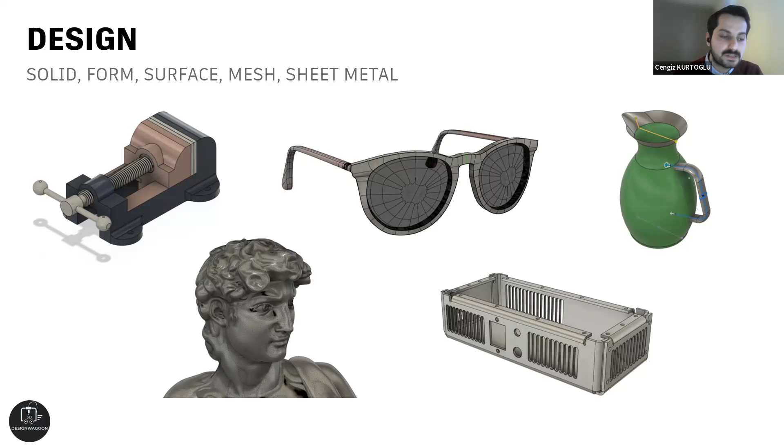And also sheet metal rules you can use in your software. And after your 3D parts, maybe you have a 3D scanner - you can use Fusion as a mesh slicer, mesh modifier, in the design workspace.

There is also animation in this account of Fusion. As you can see, there are different types of joints here, basically revolve joints. We will see these today.

The render workspace will allow us to create high quality images and animations. It's very simple to get a nice image on the same software. It will be interesting to create your parts in 3D and then create an image assigning some appearances. As you can see, there's an aluminum blue material on the appearances of these parts.

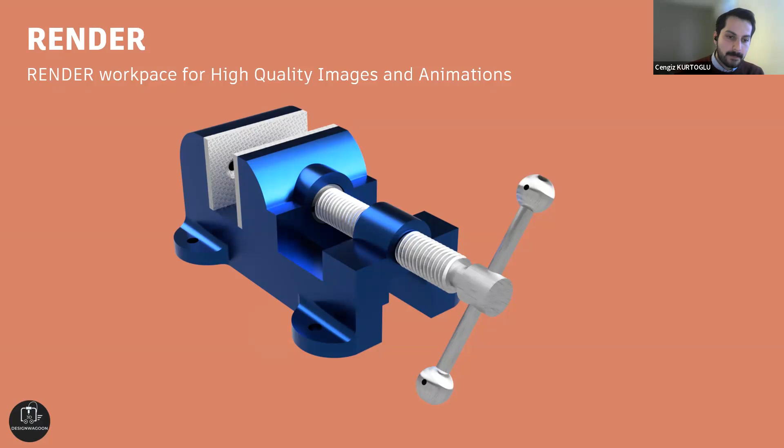After that, we can take a look at our animation workspace. We already talked about this on our second webinar, which you can check out on the Knowledge Point YouTube profile. In the animation workspace, we will create this mechanism, the robotic gripper mechanism.

After we connected all parts as a revolve, you can get this mechanism directly. But the dimensions are very important, because I already created this mechanism using some technical drawings, which we will check out on Fusion in our next slides.

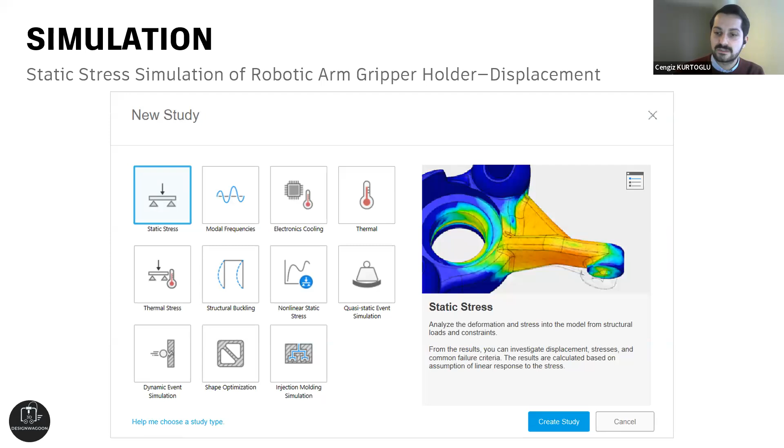For example, shape optimization or topology optimization is a widely used study. We can create lightweight parts or structurally efficient parts based on your preferred conditions. There are some examples for topology optimization, shape optimization, or static stress parts in the second animation. We'll analyze all constraints, loads, and materials in our next lessons.

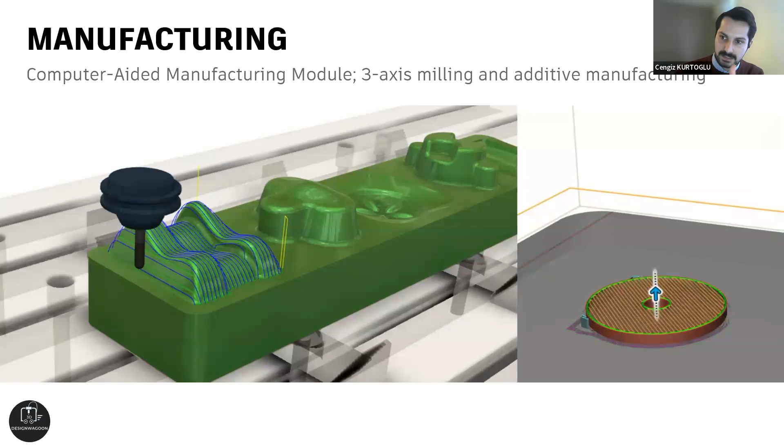Also, in this same software, Fusion, you have access to a manufacturing fabrication workspace. If you want to create mass-produced, large-scale projects or just a small part, you have access to all of them, like milling, 2-axis to 5-axis, turning, water jet, plasma, laser cutting, or additive manufacturing.

You can create your own 3D G-code. After your 3D parts, you can create a G-code adapted to your manufacturing machine. Fusion has a library of machines, and you can easily create your G-codes and bring your ideas to real life as soon as possible.

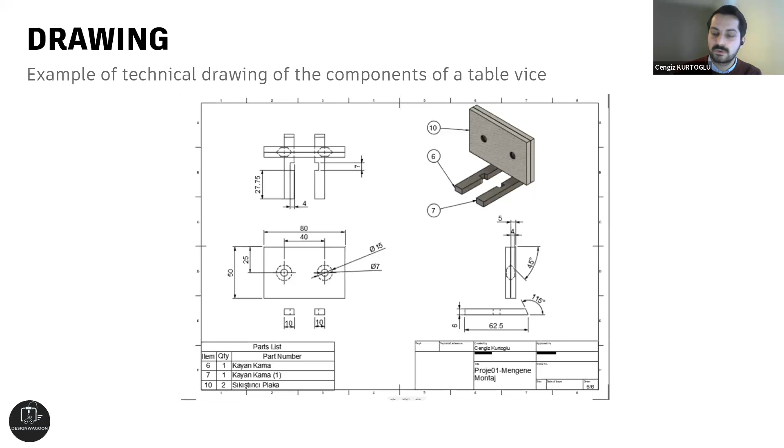Also, we already mentioned in our previous webinars, drawing. If you have to manufacture your parts, in general you have to create a technical drawing to explain the details, dimensions, materials, and parts lists. You have access to create your drawings on Fusion, and if you change anything on your 3D parts, the drawing will be updated after your authorization. Also, your technical drawing could be exported as PDF, DWG, or DXF formats.

Also, Fusion has an electronic design module workspace. You can create a 3D PCB for your team, or if you are an electronic designer, you can access all libraries for creation of PCBs, library management, simulation, or mechanical designs.

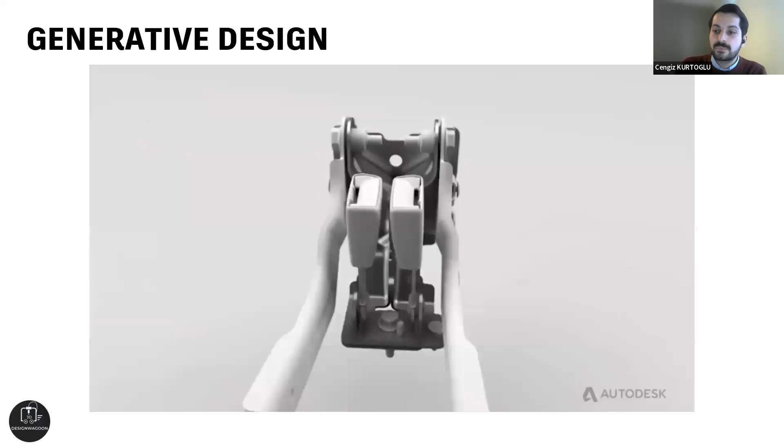After that, there's also a workspace that I liked, that I preferred of all the softwares: generative design. In generative design, designers or engineers enter design goals into the software, along with parameters such as performance requirements, materials, manufacturing methods, and cost constraints. The software Fusion explores all possible permutations of a solution, quickly generating design alternatives, testing and learning from each iteration what works and what doesn't.

As you can see, it creates very different types of parts. Normally there are 6 or 8 parts, and it should be manufactured, but with the one part you can use additive manufacturing as you want.

Let's switch to Fusion. Before starting the Fusion project, I'd like to mention you can use Autodesk Fusion directly on your web browser. Just go to fusion.online.autodesk.com and launch Fusion 360, and then you can access all your projects and data, and design directly on the web browser. It's a very quick way to access your projects because it's not necessary to download Fusion on your computer, and you have access directly from the web browser.

There are other examples we will see. Now I just want to create a component, because after you design a part, Fusion creates default bodies - body 1, body 2, and body 3. If I want to change that, I right-click on the body and select create components from bodies.

Now the body changed to component. As you can see in the browser, there's component 1, and the component has its own origin with respect to these parts, and has a bodies folder in there. I can move these parts now in the 3D workspace, but these bodies cannot be moved.

But normally I don't want to move these parts. It should be a component, but it should be a ground place for me. So after I created a component, I just right-click on the component and select ground.

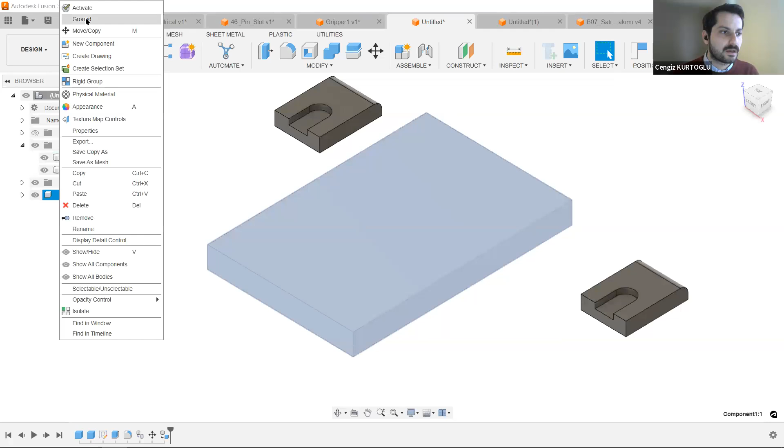After I hit ground, it asks me to capture or revert component position. Revert positions it at the same position in the X, Y, Z axis, and removes it to the first place. Capture position, as we can see, keeps it at the X, Y, Z points.

I did capture position. Now I try to move these parts, but I couldn't because there's a ground - as you can see, there's a red pin there. Well, now I want to create components from these bodies, but there are some other ways to create components from here.

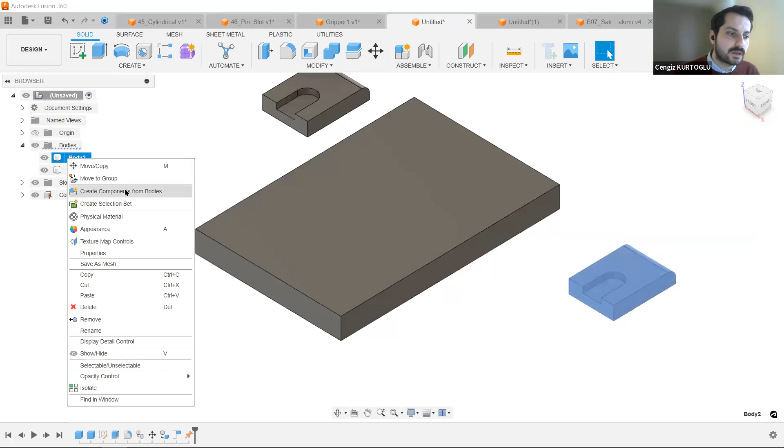After we finished our parts creation and modified the details, I just want to create a new component. Yes, we already know if I right-click on body 2 and select create components from bodies, it worked perfectly. But I just want to use these parts for a new component.

It asks me which parts I want to use to create a new component. It basically creates a new component, but if I switch to 'from bodies' here, I can just select the bodies that I want to convert to components. From bodies, one is selected.

I hit the OK button, and now body 3 creates its own component. Well, now I want to create a joint.

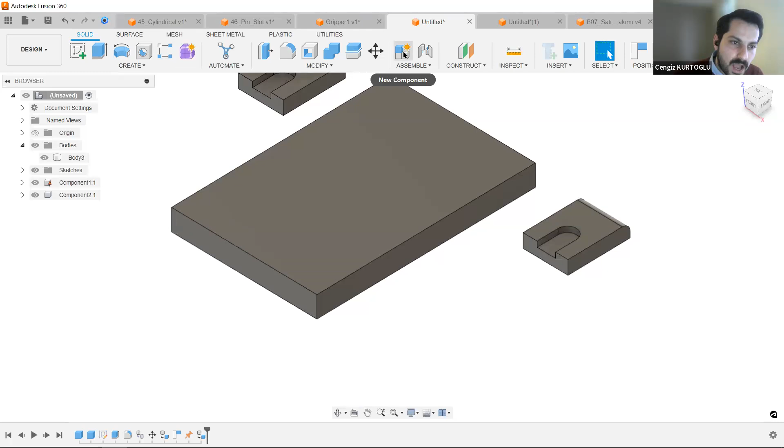Well, how can I create a joint? I'll switch to this part. How can I create a joint? It's very basic - after the new component parts, there's a joint icon, it's the J button on your keyboard. I press joint, and...

There are just activated components, the last one, because I cannot create joints for the first components that we created and modified as a ground, because it couldn't be moved. It's like a body, and also body 3 is a body - it couldn't move, it should stay in the position it's already been positioned.

Well, now there's one part left. Basically I want these points to be at the edge of this rectangular shape and to be a rigid part - it couldn't be moved. Well, there are several ways to assemble these parts, these joints.

I just want to mention this origin, as you can see, origin mode has a symbol. Well, when I get close to this face, as you can see, there are some control points - some snap points for my component for the first joint.

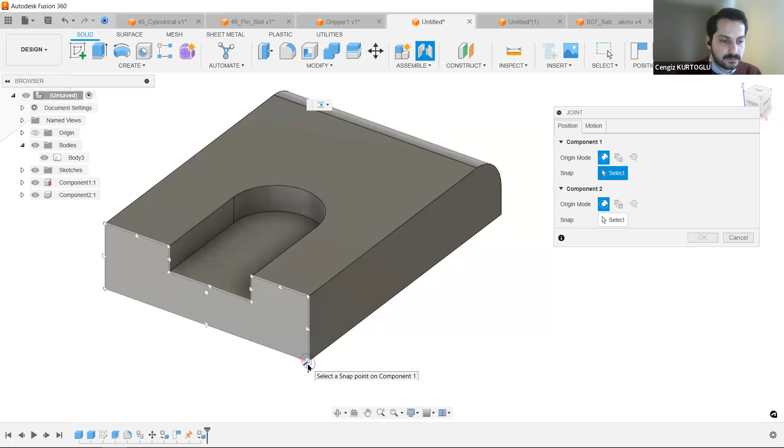Well, I'll try to hit the button for the first component, for the first snap point, and then it'll go. Because you can select just one point, one snap point on your component. After you select it, it will be gone, and it'll appear on other components.

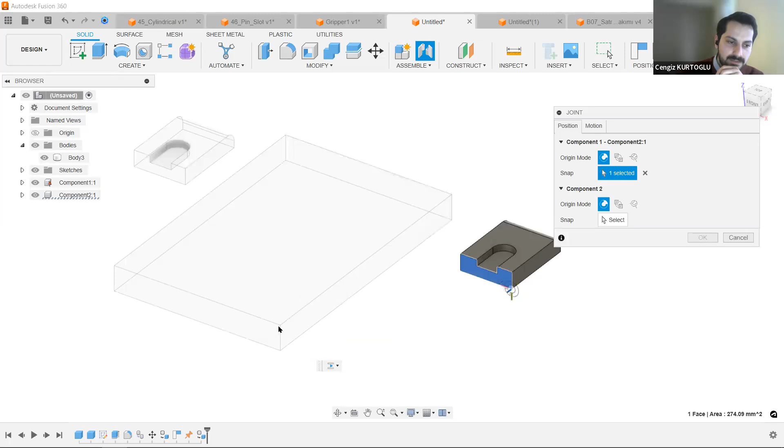Which component is this? I know this is a ground plane component, but also in the body tree you can create joints between components and bodies, but for just the second component. Now, remember my first point in here - logically it should be here, but it's different.

It's hard to select these parts, and I just want to catch these sides of this face for the control points. Control points should be on this face. After I move my mouse here, I hold the control button, and easily get the 9 control points of this face. Same logic on the X, Z axis plane of this face and this point, component 2.

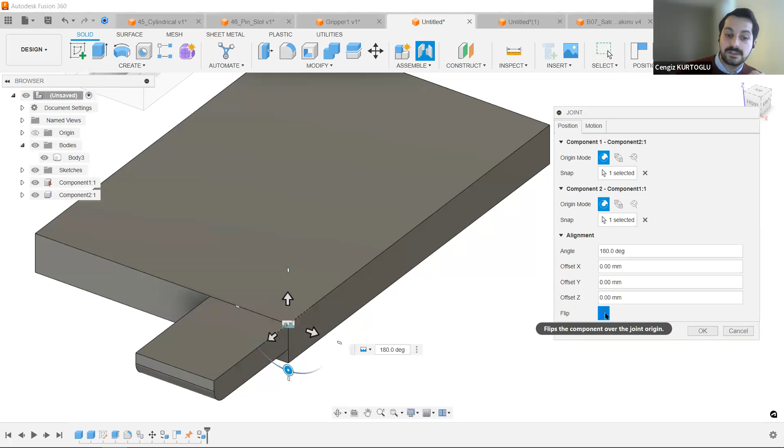Well, it created a slider mechanism, but the motion should be rigid. I'll switch to rigid, but I already selected the flip sides on my last joint. I have to select these flip sides.

Normally you already get these parts after you select from here, first part, from here, second part. Well, it created a rigid, and it couldn't be moved after all. I'll try to move it, but it works.

Now we just used the faces on the XZ plane, but now I'll try to use different approaches to create this same thing on the other side.

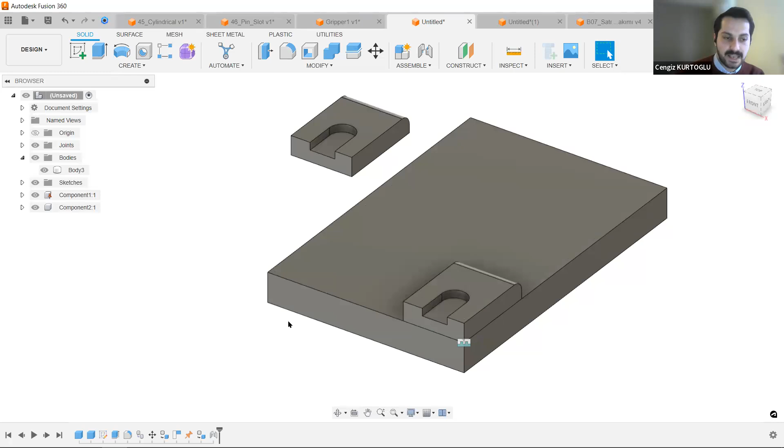Well, I hit the J button to create the joints. I remember now these are not components, it should be converted to the component. I generally use this trick from the body tree, create components from bodies.

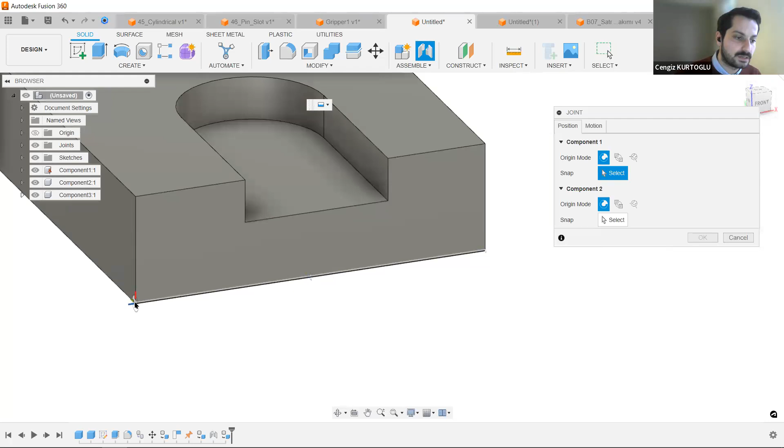It's easy and fast. I hit the J button, and normally you already select these faces, but I will try other approaches. I can use this line, this edge. I click the control button, and there are 3 snap points on this side. If I select on this axis, in the x-axis, edge of the x-axis on the negative side, it's selected.

And now I'm coming back here. There's also an edge. I hit the control button, same logic. There are 3 points. I'm selecting the last one of these points, and it's done. It created a rigid joint, and as you can see, it worked perfectly.

Well, you can use these control points as you want. Also you can use this side of the edge, also the last points for both of them, or these edge and the last points from here, and this edge and the last point here. It's all good, it's all done. You can use these types of control points. It's very easy, and you can use these approaches to create your mechanical assemblies, and it's not hard at all.

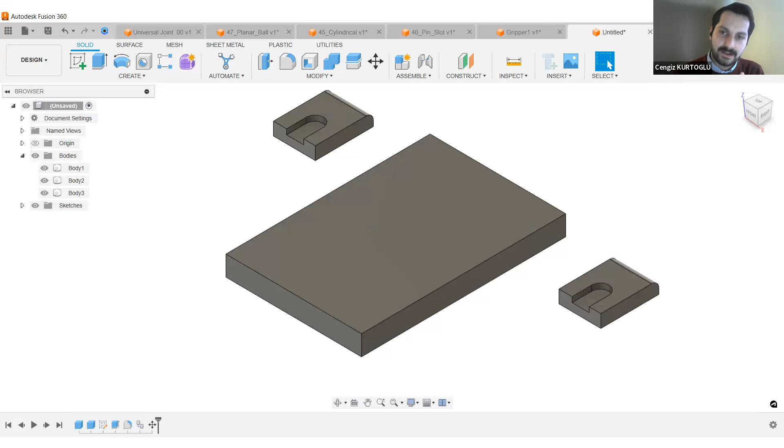Now we will switch to a little harder example on our next lesson, next slide.

Well, in this particular subject, normally I already use the edges or faces to get the snap points for my project. But in this example, there is no connection between these parts. It should be in between the axis, and I have to figure it out to create this assembly.

Well, let's look at Fusion. Joint, origin. As you can see, in the front there's no connection between these parts. Maybe there's a crank, there's a mill between the parts, but I have to create this mechanism from 2 of the parts, and after that there's a third component here.

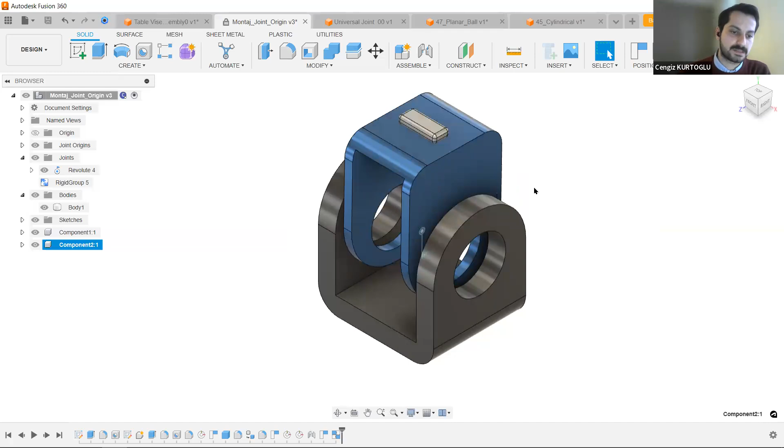It should be moved from the blue parts, the second parts. Well, okay, let's try. I'll erase the points, and now we have to create these joints.

Now, as you can see, these parts are bodies, it couldn't be moved. If you want to go from bodies to components, you have to make the ground, at least one of them, on your assemblies, because if it's not a body on your projects, on the assemblies, if there is no ground part, it couldn't be moved, it couldn't be a response for your mechanism.

Now body 1, it's okay, the component is already ready. I hit the J button. We already use the origin mode as a simple on the faces, directly to the faces. The points could be reached from the faces, but there are other types of origin modes, as you can see, between 2 faces or 2 edge intersection.

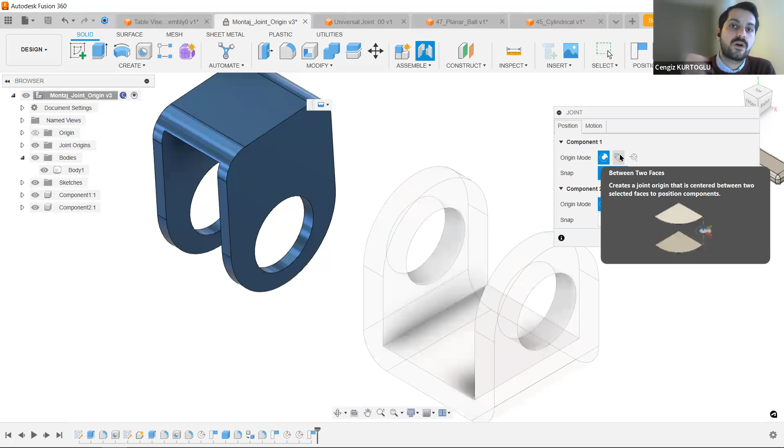Well, in this particular example, we have to switch to between 2 faces. Between two faces, it asks me for plane 1 and plane 2. Well, for this project, I can create the origin between two faces as a plane.

It should be in the inside of the parts, or these two sides of the parts. Well, I'm selecting inside of the body, these sides, and this plane as a second plane.

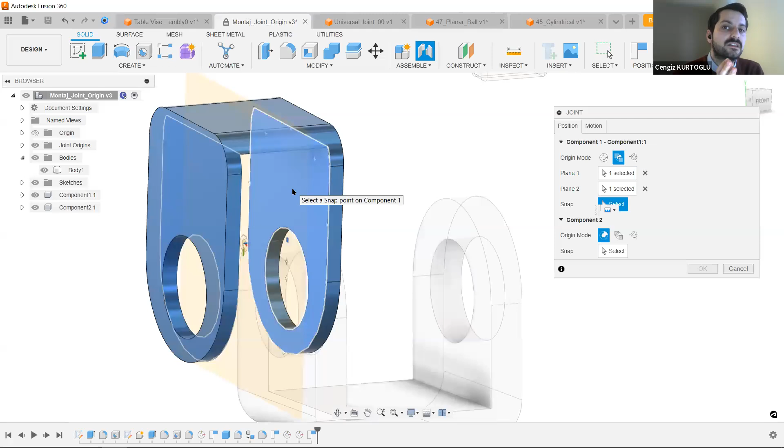Now, between the two planes, I have access to several control points. I'm zooming out a little bit, and now, as you can see, in the circle it captures, it snaps between the two planes. After selecting the circle, it creates a little joint origin between the planes with respect to the circle.

There are other points, other control points. You can press the control button and get the points as you want. But because, as you can see, I cannot select the circle, I'll release the control button. I'm selecting the circle.

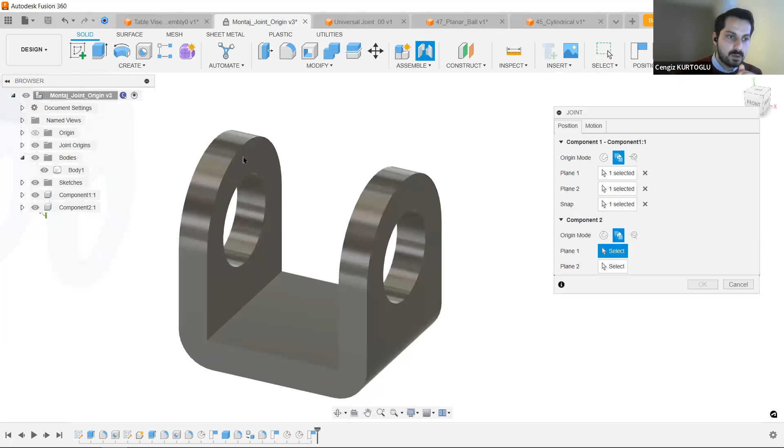For this first part, I already assigned joint origin points, and now I have to assign for these parts also. Well, origin mode, it should be passed between two faces, okay, plane 1 and plane 2.

Same logic. I'm selecting circle, and it created a rigid motion, but I don't want to create a rigid motion. It should be a revolute.

Voila. Preview motion. If you select the preview motion, you can see the parts moving a bit with respect to the axis. The axis we created with respect to joint origin.

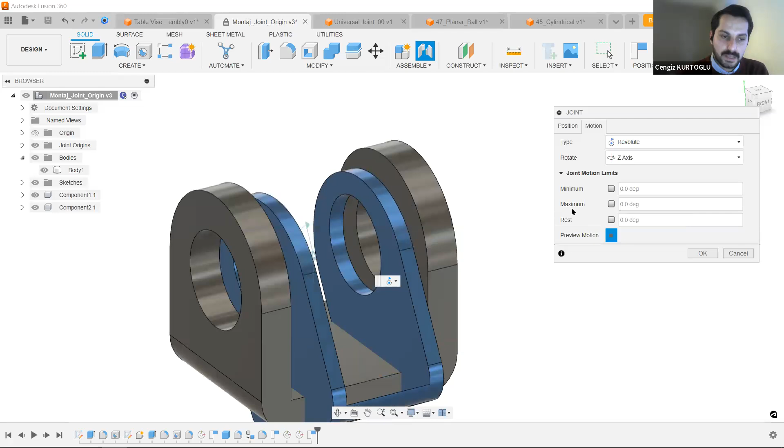There's a little trick from here. You can limit your motions. There's a joint motion limit icon here, minimum and maximum. You can assign your degrees directly here, or after you created these joints, you have access to assign your motion limits. Now I hit the OK button.

As you can see, we created a beautiful joint origin. It's very interesting, and at the level of the assemblies it's very easy to create, but you have to pay attention about the faces that you selected, so it's perfectly aligned in between the two faces.

Now I need to move these parts to the center of these parts, but I don't want to get degrees. For example, it's 27 degrees. I just want to 0 degree. You can move it with your mouse here to get 0 degree, or sometimes it's not easy every time.

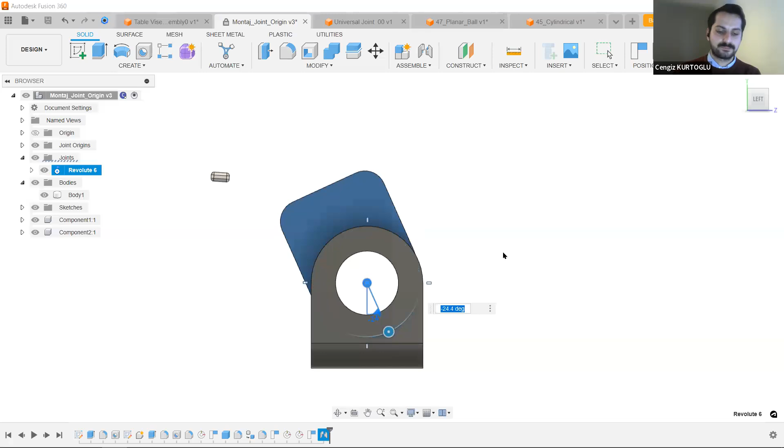Double click on your joints, and it will be reached as the right joints. You can modify the degree here, or you have a folder named joints, Revolute 6 or Revolute 1. Right click on your revolute and drive joints - you have access to change the degree directly.

Now I want these parts moved directly here in the center of the bottom face of these parts. It should be at the top of the second component.

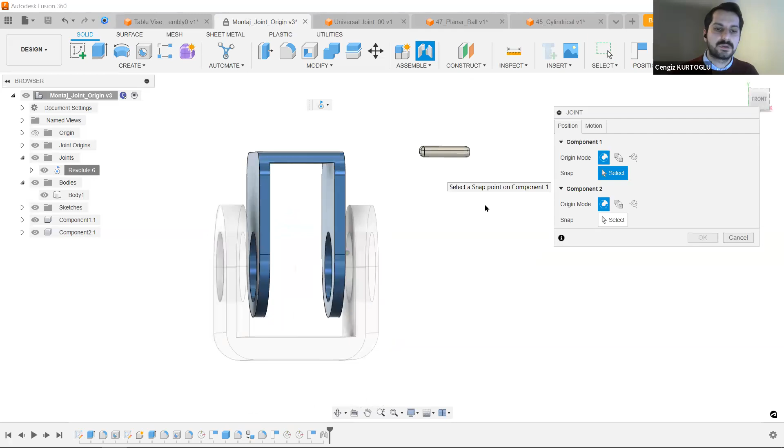Now I hit the J button. It could be a simple origin mode. I'm moving these parts - as you can see, the bottom of these parts, on this face, there are 9 points. I'm holding control on my keyboard and hitting the center of this face. It's selected.

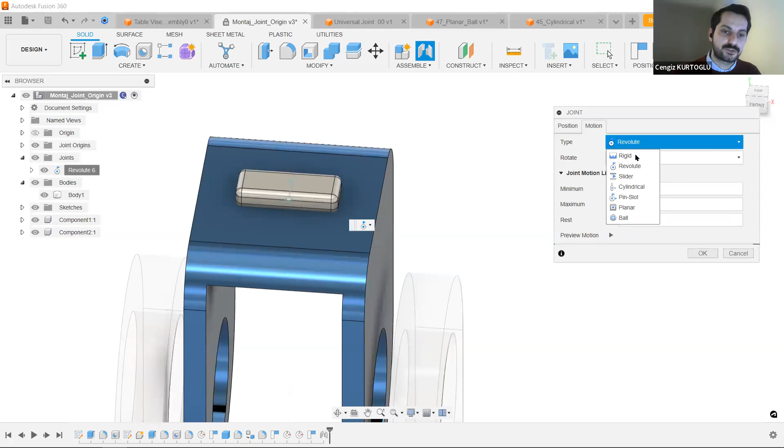Now I'm coming back to the top of these parts. I'm selecting the top of this blue component. It created a motion as a revolute motion, but it should be rigid. Preview motion - yeah, it works perfectly as I aimed to create these parts.

Now I can move on here. Also, for example, we decided to modify the design of the parts. If I hit the Q button, press-pull the design, I can modify my assemblies directly with respect to all joints.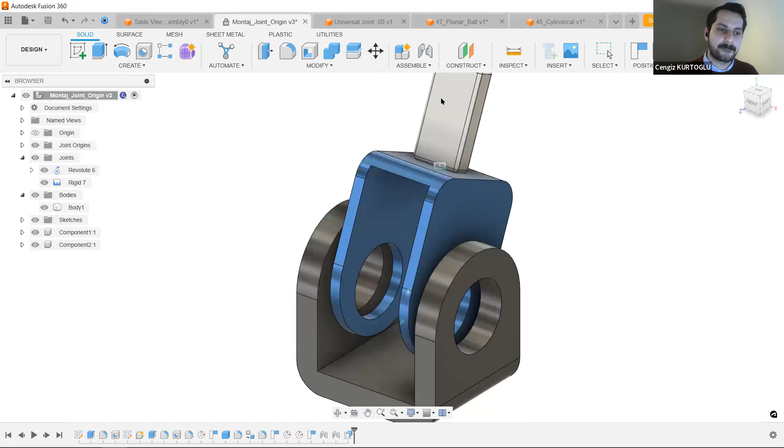It's really, really handy to create these parts, and you have access to create your assemblies and modify your part on the same software, on the same interface. It's a very handy and quick way to create your mechanism.

We'll continue our types of assemblies in the next slide. There is a pin slot motion. We can change the type of the joints, as you can see. It should move as a slider here, the slot parts.

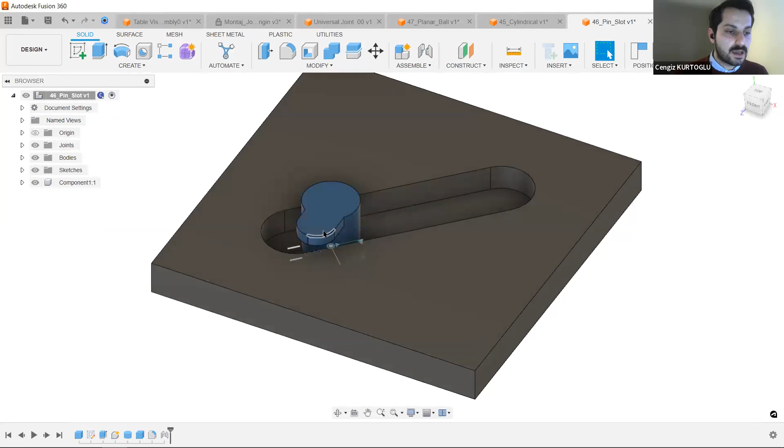Now the motion should be revolved between the axis of this cylindrical part, and a slider should be here in the parts of the slots.

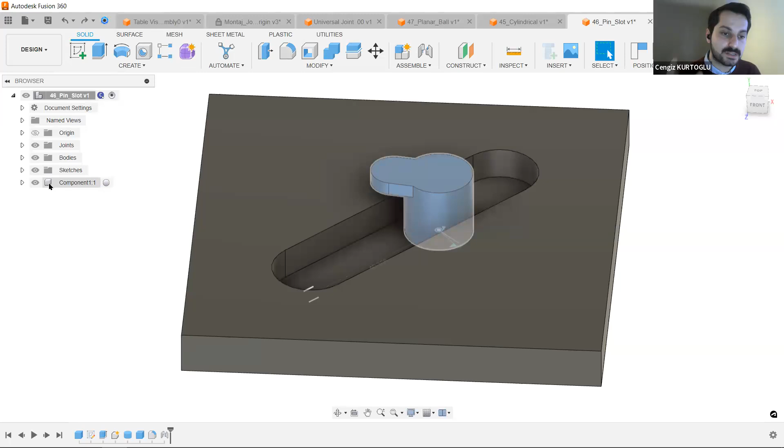Or sometimes I just need to change or modify the type of the assemblies, because sometimes very large assemblies need to be modified. I just want to switch, suppress features. I hit right click on my icon, the last one, the last icon of the joints - suppress features. Now in the timeline, there are no joints.

If I change it, it could appear on the browser also, but now I just have a component and bodies. So I hit the J button.

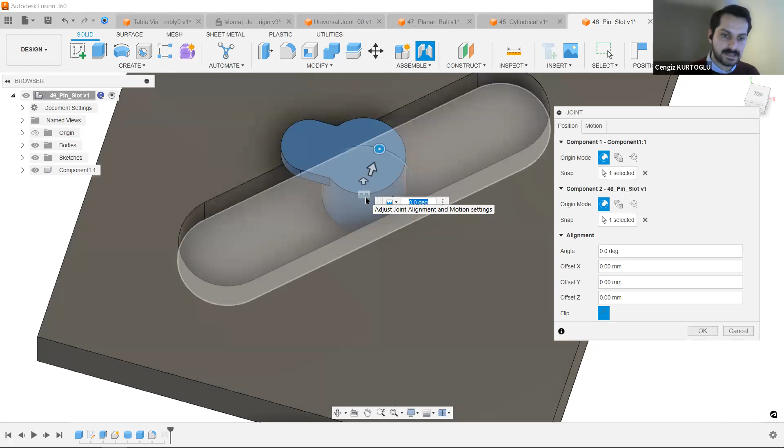I just want to select the bottom points of these parts. You can select the points of circles. We will try. For example, if I select the center of these parts, I move here. Well, there is a point for my centers also here.

I'm selecting the center of these slots, and as a default motion it's created a type of rigid, but I want to change it as, for example, a slider. If I select as a slider, no, it's not moved, it's not the exact axis. I just want to slide. For example, x-axis, no, not at all. Y-axis, no.

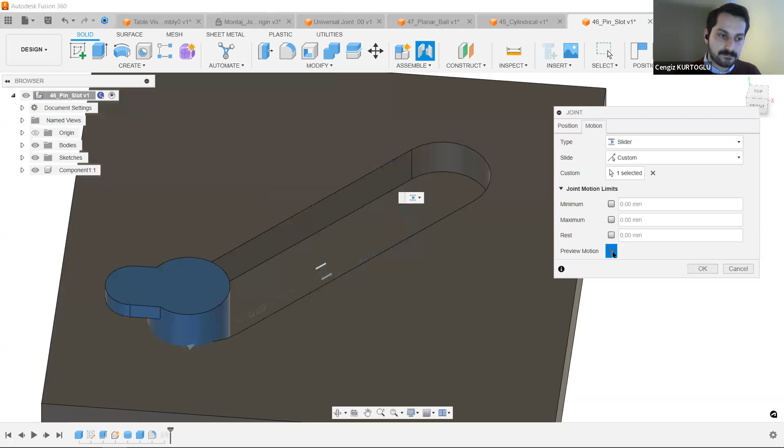So there is a fourth one as a custom axis. If I select the custom, I have to say to Fusion this axis of orientation as a slider. Well, nice, I have reached a slider motion. It's just a slider motion. I cannot rotate the parts. Well, as a preview motion, yes, good. But I just want to rotate the parts while they are sliding this custom axis.

Now I'm changing as a pin slot, as a rotate. Well, now it asks me the part of rotate. I'm selecting the x-axis, no. Y-axis, no. Z-axis, well, it gets the good rotation as I want.

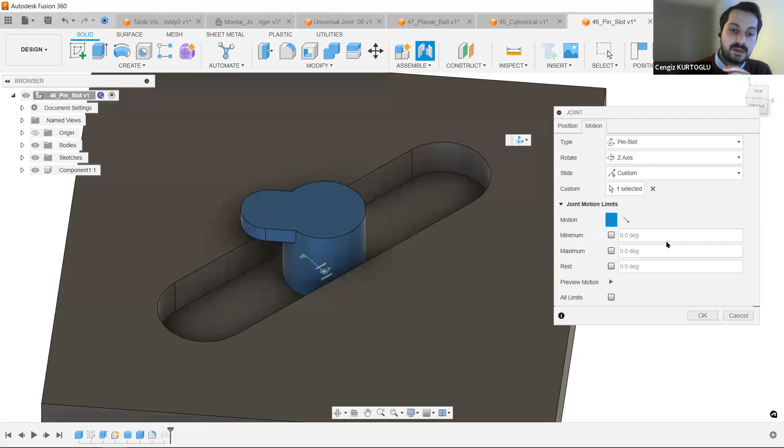But the slide axis, it's not true, X or Y. It should be a custom axis, and the custom axis of this edge. Now, as a pin slot type, in the preview motion it's rotating on the z-axis, and also as a slider it's moving with respect to the custom edge. Well, it's all done. Great.

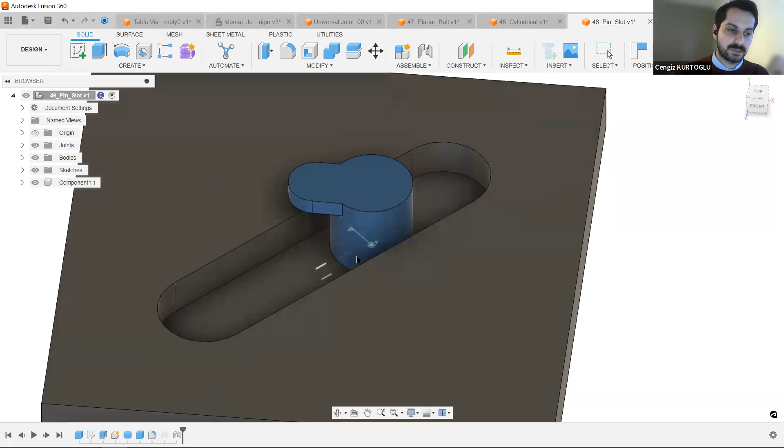Now I can move as a slider and rotate here. I already mentioned about the joint limits, because when I arrived here, no, it's not working. The mechanism, it's not good at all, because physically it's not possible. Now I can

assign joint limits. For that I have to go to the joints folder, pin slot, right click, edit motion limits. When I click edit motion limits, there are rotate motion and slide motion. I'm switching to slider motion minimum, minimum of these parts. There's a little flag there. As you can see, we can change the value in millimeters, and a maximum value of these parts. Well, it should be a minimum of minus 30 and maximum of 30.

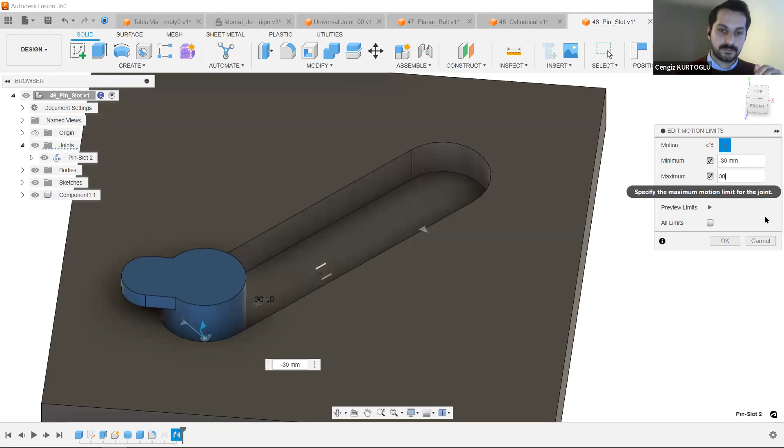As you can see in preview limits, you can reach the parts. Now I'm hitting the OK button. Well, it's quite good, and it's all done.

Let's continue to our next slide as cylindrical joints. It should be easier after pin slot. Cylindrical, it's the same logic, it slides on there and rotates on the z-axis. Erase these parts, these joints, and hit the G button, or the part is already designed in the position that I want to joint.

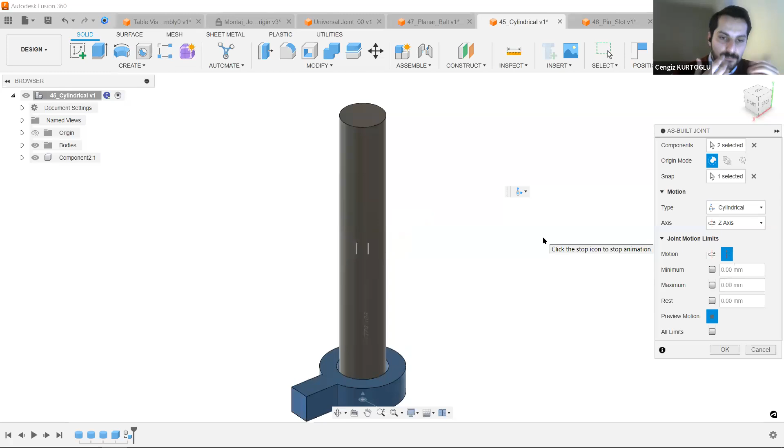That I want to create the assembly, so you have different types of joints, as-built joints. Shift G on your keyboard. As build joints, you just select the parts and the types of motion. You can select your type of motion. We have to say the snap point, for example, as the center of these parts. Well, it's not complicated at all, because the joints, the types of the joints, it's very simple. The logic of the snap points is quite important to get practice yourself, and then you

can create different types of mechanism as soon as possible. Voilà. Now, on our next slide, I have another, planar ball. I just want to mention quickly, like a joystick part, it should be planar ball, edit joint.

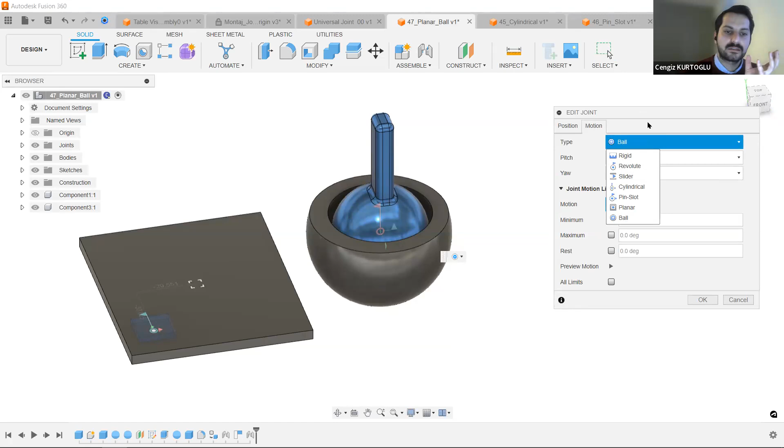In the type of ball, you have to select a sphere, as a part of a sphere, and then you get pitch and yaw action on the part, and then, as you can see, it could be moved as a joystick or planar. As you can see, the type of the joint changed as a plane. It could be rotated on the XZ on the y-axis, and also it could be moved as a planar face. It's very interesting, you can check it out on the different types of projects also.

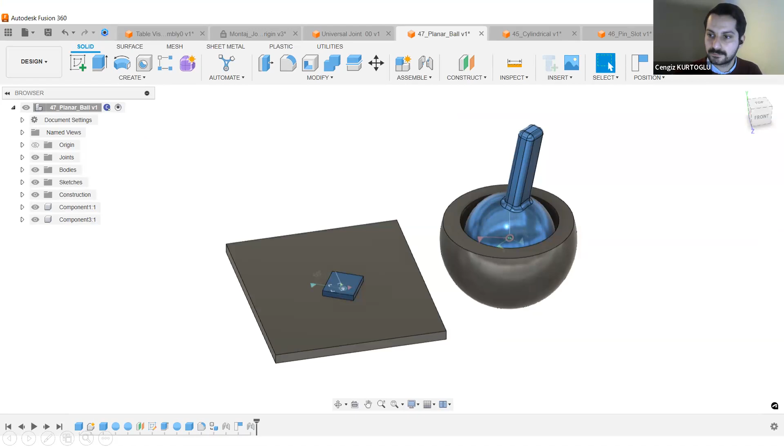Well, I just want to mention before we switch to the other project, this is a universal joints mechanism. Basically, we already mentioned the 6-axis of the robotic arm in our first webinar. It had 6 axes to basically rotate, like you're using rotate joints.

We could create universal joints to change the axis and add new axes to our parts. For example, these parts should be grouped, and the first cube should rotate on the first axis, and the second part of this cube could rotate for the second axis, then we add other cubes for the third axis. It could rotate, and also we add a fourth axis for a simple universal joint. It's widely used in the industry, universal joints.

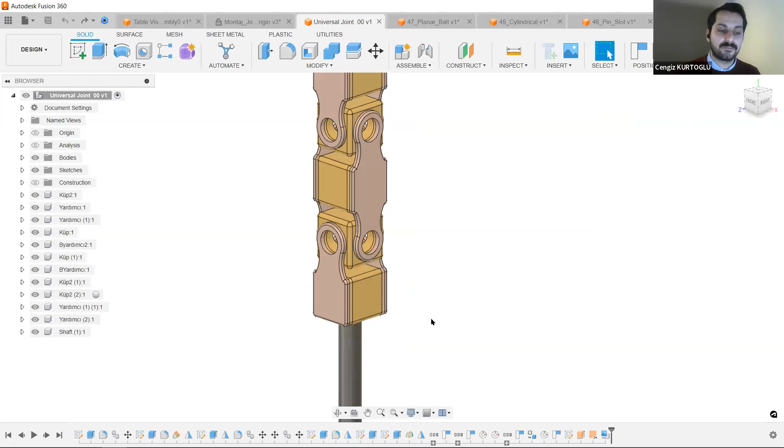In this design, as you can see, the component is not moving yet, it's moving as a component but not assembled. The first part is a body, that is great, it's a shaft, but the other parts are not assembled. We have to assemble these parts.

But I have a tip for you. Normally, these three components should be rigid, should move together. So I have a tool for these parts called rigid group. It's very useful on this project because whatever capture position it's okay.

I'm selecting the main part as a cube and the other parts for the rigid group. And now, if I change the position, as you can see, the rigid group is moving together. Well, this is great.

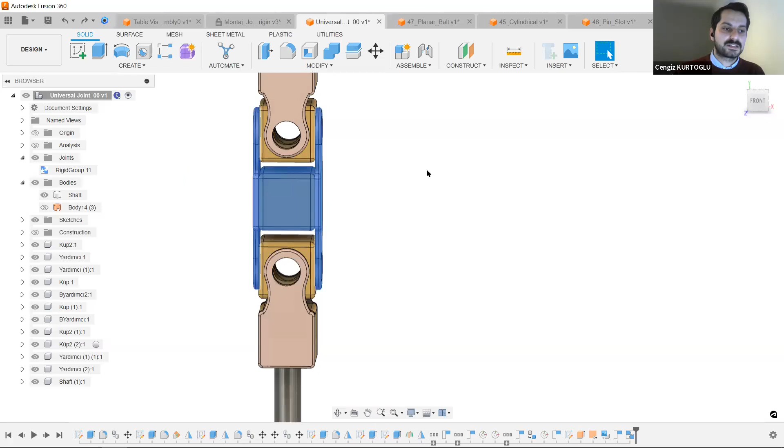Same thing for these parts. As you can see, if I add a joint, it should move together for this particular part, and I'm selecting rigid group for these three components, and now it's great.

And the last one, these parts should be a rigid group. Quickly, I'm selecting the parts, and then it's done.

We can just begin from the first axis of these parts. I already designed the position to assemble these parts. It's basically should be revolve.

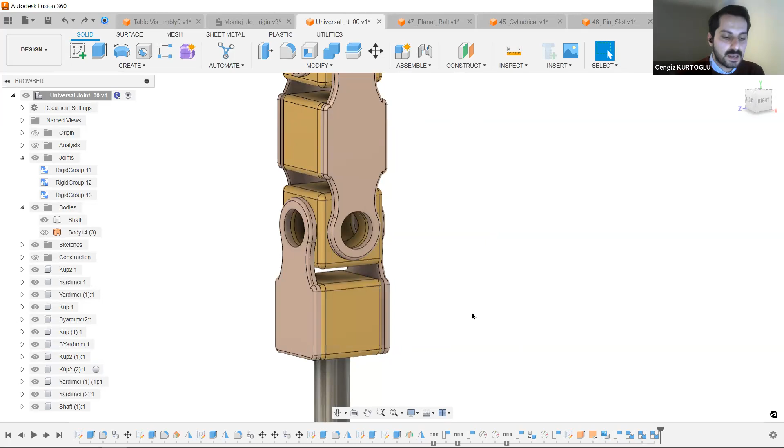Now I'm using Shift G as a part for this cube and the body, for example. Now I'm changing, selecting the snap point as a revolve, the type of revolve. Normally I don't have access to the inside of the cylinder, inside of the cube, but if I hold the control button, as you can see, I can select the snap point at the top of the cylinder. It's great, it's moving as I want on this y-axis. Cool.

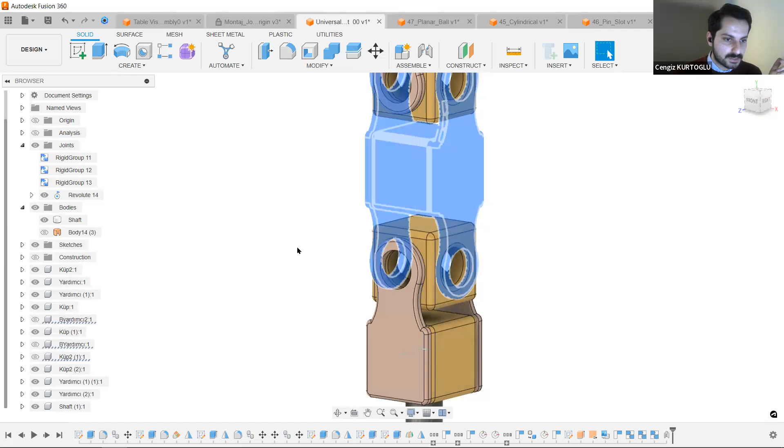I'm continuing to our second axis of these cubes and parts. Now, if you want, you can select these parts, there's component 1, 2, 3. I'm changing the visibility of these parts so it's easier to manipulate in the software quickly.

Now I'm selecting Shift J for these parts and any parts we want. Same thing, revolve. Revolve could be any circle of this axis. It's very simple, you can select directly at the last point, last circle of this axis, or the inside of the axis, or the face of this axis. It's very handy, you can select as you want.

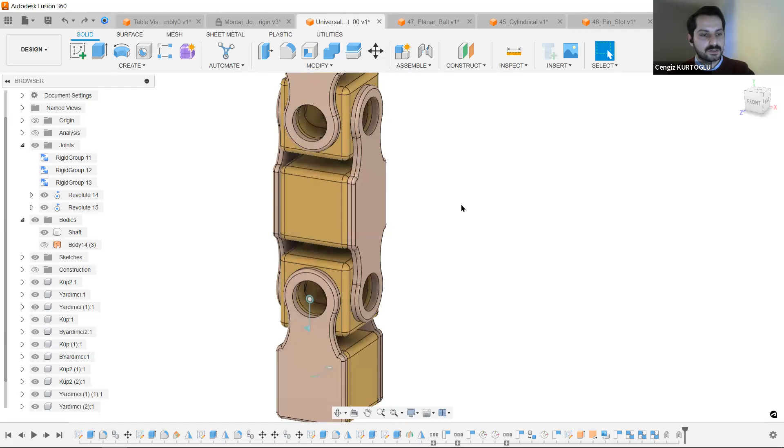For example, I'm selecting these parts up and down. Great, so I have axis 1 and 2. I'm reopening these parts. We already created as a rigid group, Shift J button, this cube and these parts, for example, same thing, revolve the last circle of these parts. Now I have 3 axes of this universal joint.

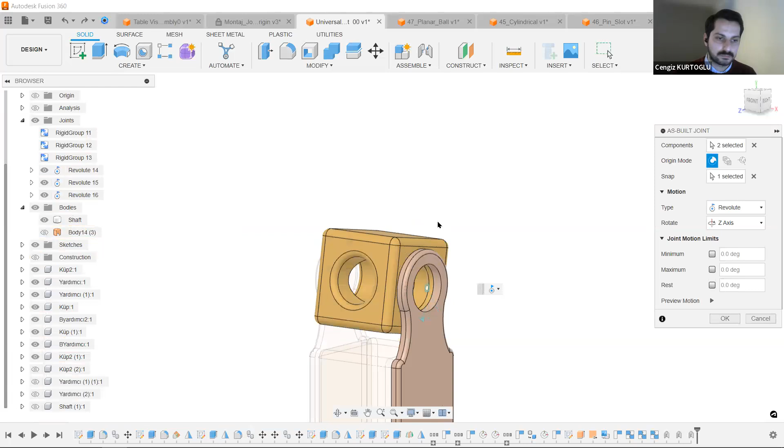I'm continuing with the cube. I'm selecting these 4 last components because it will be easier to see. Same thing, Shift J, this cube and these parts, for example. Same thing, you can select the face if you want. Now hit the OK button. We have 4 axes, as you can see.

Voila. And now I'm reopening the 4 parts, the last parts. We have to add our last component, last joint for 1, 2, and the circle of these parts, revolve. Yes.

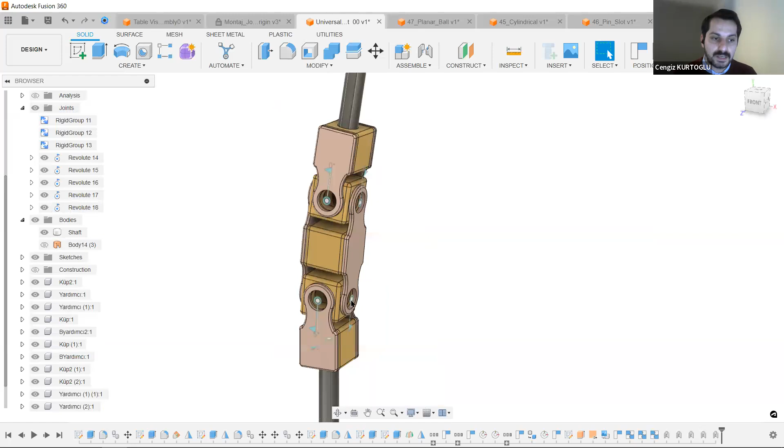And if I hit the mouse very quickly, you should get noticed that I don't have any edit joint limits, because yes, we can make edit joint limits. I don't have time for that, but you can make edit joint limits. For example, from here it's 90 degrees, minus 90 degrees to plus 90 degrees, as you want. And after you create and assign your parts as edit joint limits, you will have a chance to get the exact position for your universal joints. For example, I'm changing it as a drive joint. It's very cool and handy way to create your parts.

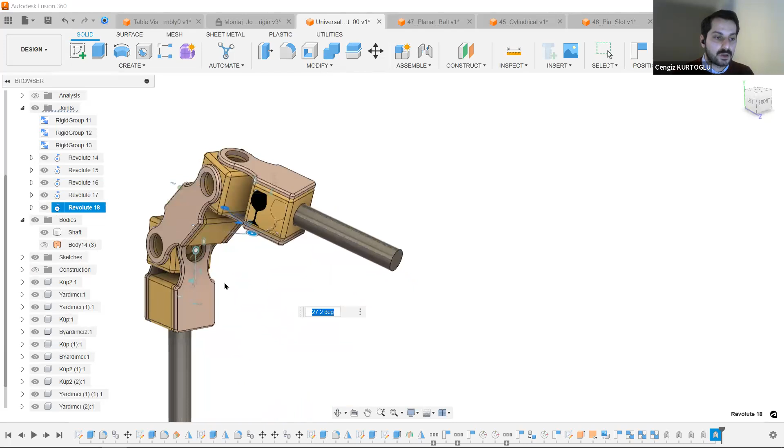And after that, for example, for our robotic parts, we have to find the exact angle for these parts. Now you can change as you want. Hit the OK button. Now it's okay. I will continue to our next lesson.

Next slide, we already seen these parts. I just want to mention how you can create these joints, this gripper mechanism.

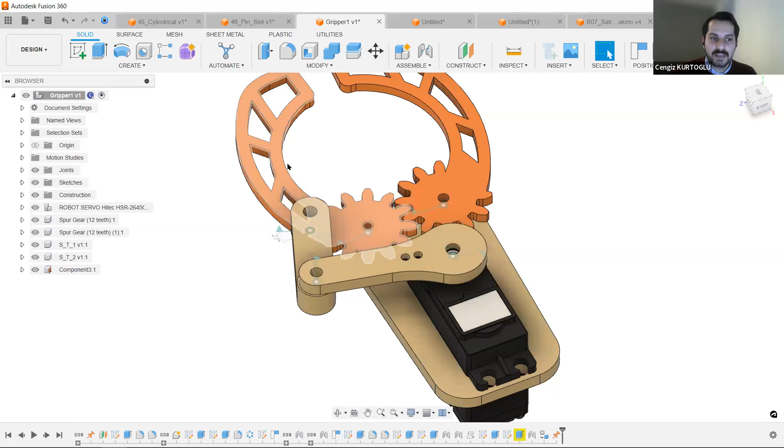As we mentioned, there are revolute joints, same as universal joints. You have to get the axis as a circle or the face as you want. After you assign the revolve for two of the parts, it should be components for all bodies. As you can see, there's a pin, the red pin. It couldn't be moved. If I change the pin, the assembly shouldn't move.

All the joints work perfectly between these, because there is a motion link between two of the gears, as the same ratio of the spur gear. If I turn the first one, the second one should turn the exact same degree between them. But you have to select the reverse, because if you leave it as the same rotation, it won't work.

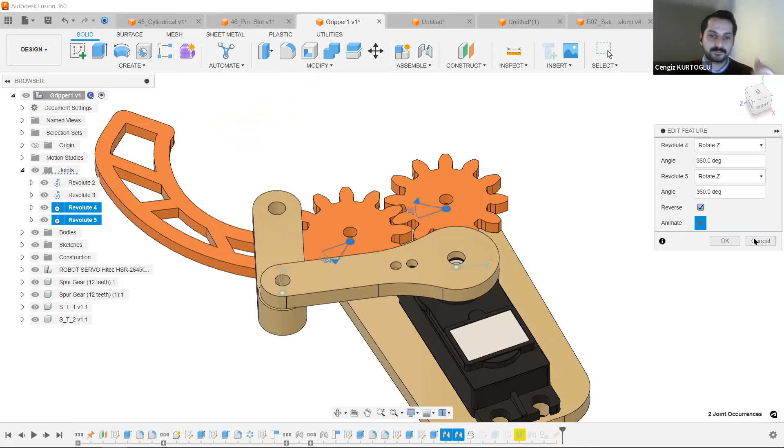Yes, I know there are several parts. It could be a little harder, a little complicated, but no, it will be easier to mention sub-assemblies, to mention part by part.

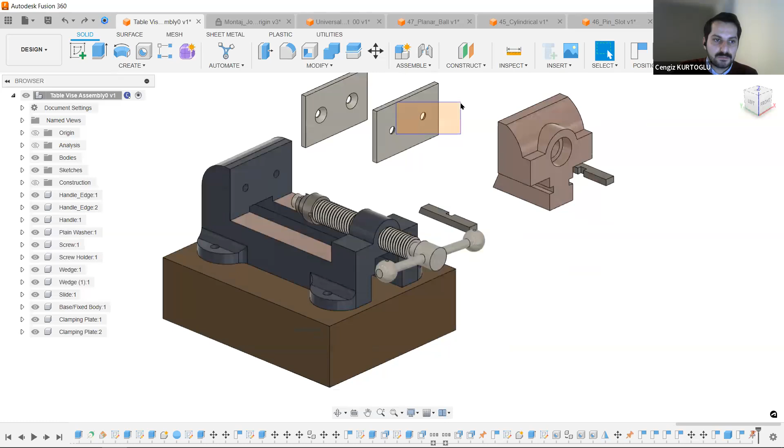For this table-vise assembly, we have to start with the ground plane, because all parts could change position otherwise, since there are components. I can get a base fixed body, right click, and ground it. That's great. Now I continue to all these parts, because all the little points, little parts should be screw, and the screw holder.

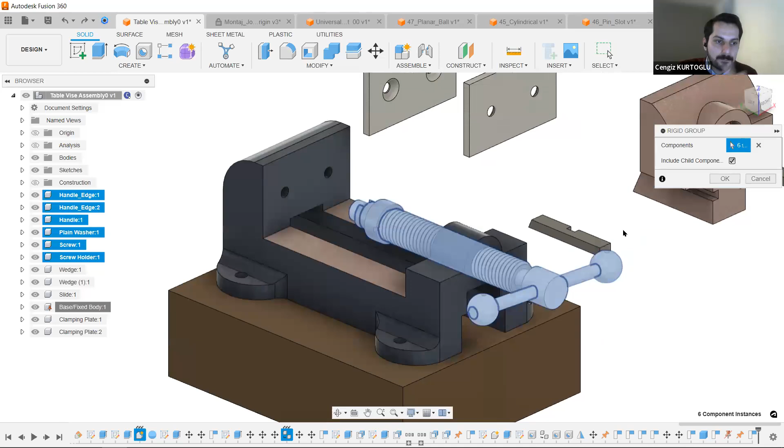I can assign a rigid group for these parts. I'm selecting rigid group, selecting capture position. For the first part: screw, handle, and the handle edge, and this screw holder, and also plain washer. It should be revolved, but it's okay. I'm selecting as a rigid group. It's done. Now, as you can see, it will move.

Great. There are other parts here, for which these bottom parts should be moved after these wedges. And there's a cylindrical hole here to get joints between the two of them.

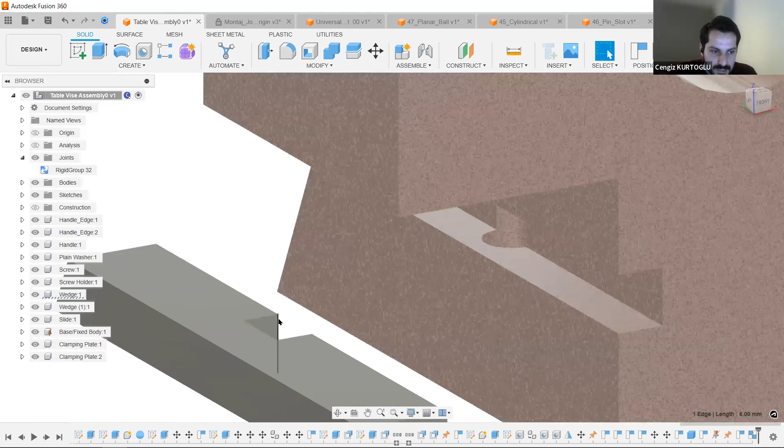I have an idea to make these joints. Basically it should be joined as this line, this edge, and this edge. This is an idea - it could be, but you can use other faces, like this face should be here, or the bottom face should be here. You can select these edges to these edges using control points. You can use whatever you want.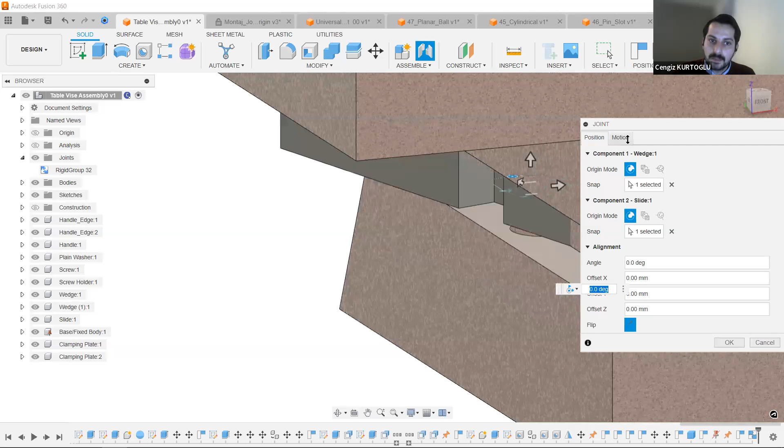It's very handy and quick to get information from the joints. I'm selecting this edge from this edge, holding control on my keyboard, and it's done. The motion should be rigid. Great, same thing for this second part, point, point, and then it's done.

Nice. There is a clamping plate, should be here. How can we do that? Very simple. This circle should be here. It's basically like that, and the motion should be rigid. It's done, it's okay. And the other clamping plate, this circle, this circle.

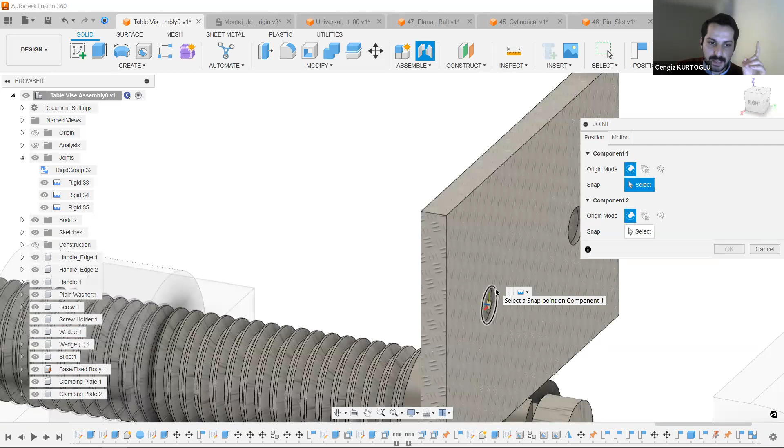But I selected the wrong points. I modify, erase these snap points, and select the circle. Now I'm selecting the other parts. It's done. Motion: rigid. Cool.

Now, it's very simple. What should we do? These parts should slide on this side of the base body. There is a line, there is a face between two points - it could be edges. There are lots of ways to make these assemblies, but basically I'm selecting these edges between two faces. As you can see, you get the edges.

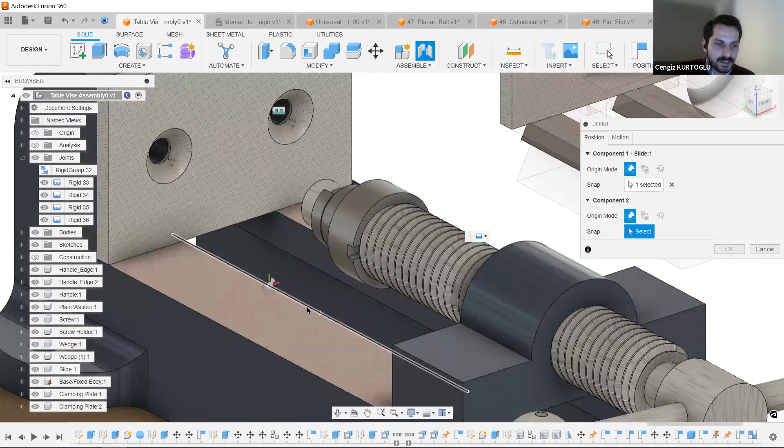I hope you can see this particular edge. Control points, I'm selecting the control - I already selected, it's done. And in this face, I'm selecting as control points these parts. But the motion should be sliding.

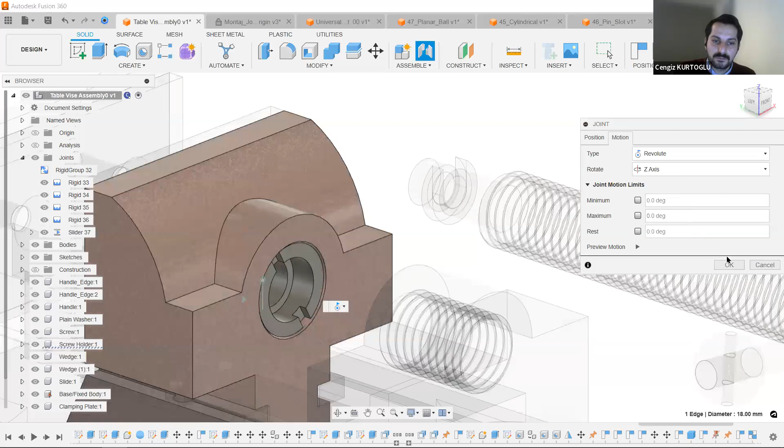We are starting to make our parts. Now I have to revolve these parts, this circle, in that direction. There is a point here - as you can see, this edge should be here, for example. It's already selected the circle. Second circle, the motion should be revolve. It's okay, hit the OK button.

Now it's sliding and revolve, but there is no connection between the slider and the revolve. There is a tool to assign that - which tool? Assemble motion link. It allows you to define the rotational or translational relationship between the joint degrees of freedom.

There is a section view, section analysis for these projects. For example, here I'm working as a quite detailed.

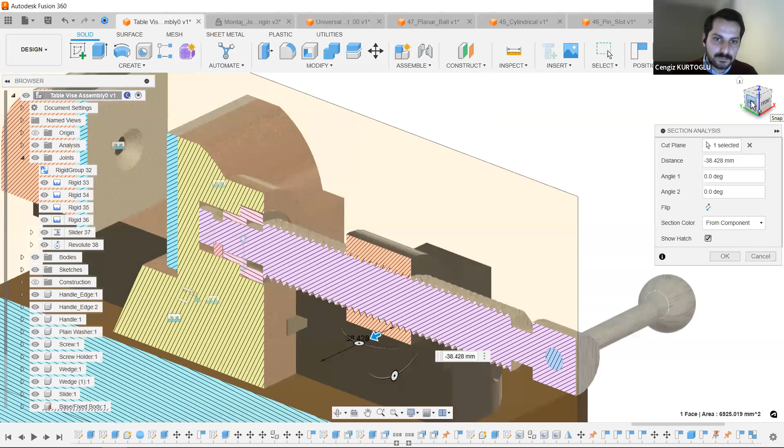As you can see, there is a gap. It should be moved here, exact position. You can work on in details, but I positioned the parts as they should be positioned.

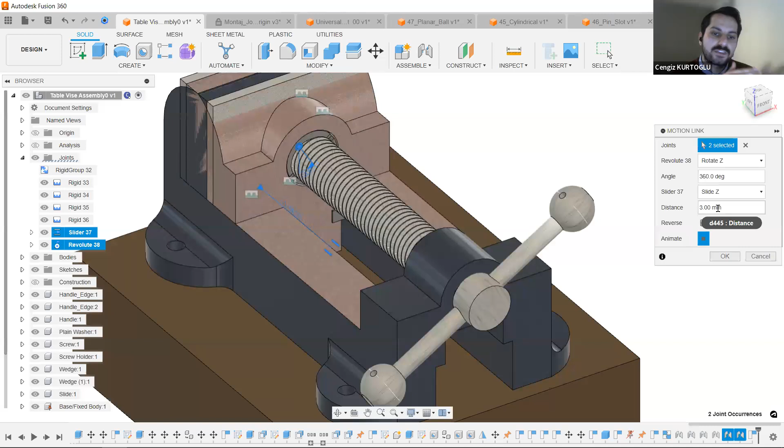Now I'm selecting motion link, capture position, slider, and firstly revolve and slide. The distance should be between the threads. I created these threads as 3 millimeters. So if the distance between the threads for each of them is 3 millimeters, it should be a 360 degree. Hit the OK button.

Now the assembly is created as a motion link. If I slide, if I change the rotation, something like that, it will be moved as it should be. Voila. If you have a question, just ask from the chat.

On our last 10 minutes, I just want to switch to the product design and render workspace. With product design, you have access after you get the product design extension, there is a plastic tab on your Fusion. And the advanced tools will appear after you have the product design extension. I just want to show you some examples.

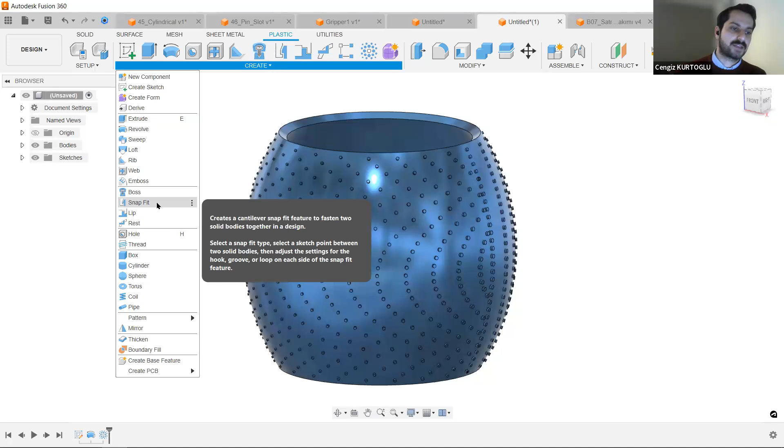Now, in the plastic tab, you have some different types of creation, like snap fit. Because if you create a product design, for example, it should be electronic parts or a smart device. The design should be closed, for example, with a snap fit. You can create different types of snap fit in this tab, in the plastic tab.

As you can see, there is a quite advanced level of the geometric pattern feature. As you can see, there's a tab for geometric pattern. You can pattern with different size or distribution, gradients across a face or the solid body, as you can see. We can check out this feature.

For example, I already created a basic vase design like an arc. After that, in the geometric pattern feature, you'll have object size. You can create different objects. I already created a cylinder, but you can change to a sphere.

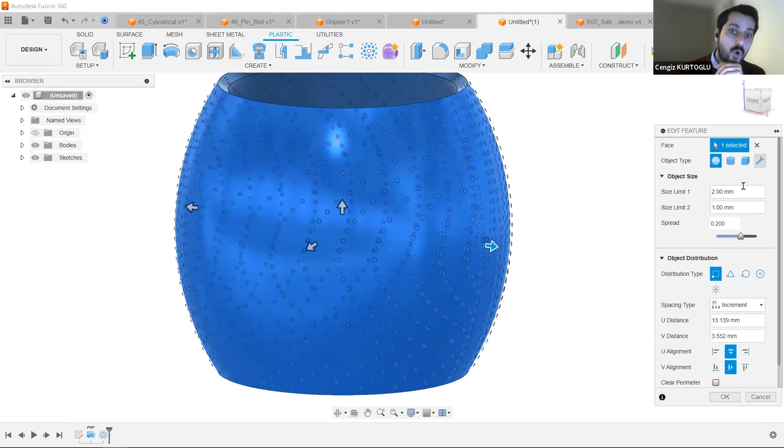You have access to different types of objects. Also, you can assign your specific parts of your type of objects. After, you can change the object size, the limit 1, 2 millimeter to limit 5, for example. It changes the gradients, it creates gradients between the objects. In the center, the parts could be bigger, and the last parts, the last edges should be smaller.

And you can change it, like we created in the pattern, circular pattern, rectangular pattern. You can change the object distribution type, spacing type, increments, U and V axis as a distance, and you can change the alignment. It's very handy to create different types of geometric pattern on Fusion.

Yes, there is a question on the chat: it's not only in plastic, we can use it in solid also. Of course, exactly. You can change the type of the rules as plastic or metallic parts. It's very handy, and perhaps you already tried it.

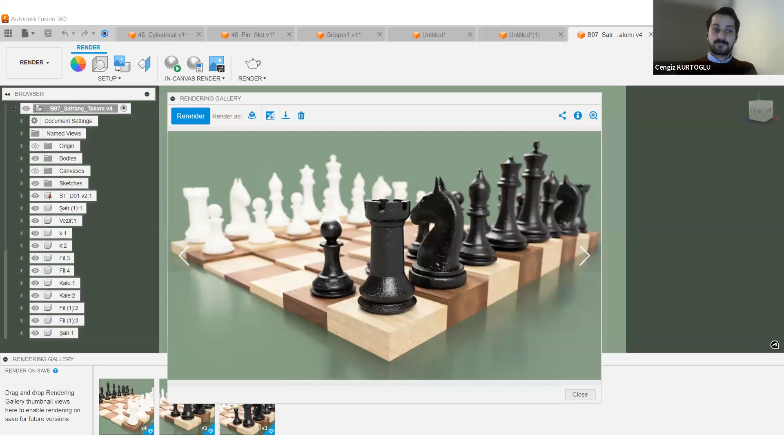Keep going if you have any question or comments about this particular workspace of Fusion. Just send us or ask us your comments. Well, the last part of this webinar, I just want to mention the render workspace, because we need to

create our projects as an image from time to time to add to your, for example, thesis or projects, or for promoting to your jury, your teachers, or your clients. So we can assign different types of appearances as materials on the render workspace. Also, we can change the camera settings or environment settings, and we can modify or add some depth of field, focus point for your projects.

Well, quickly take a look at these projects, these chess parts. I already designed these parts on Fusion, and I assigned some appearances. You can access directly on the Design Workspace. If you hit the A button, Appearances, you can access the appearances, or if you want, you can go to the Render Workspace and select Appearances here, and then it will show the library of Fusion 360 appearances.

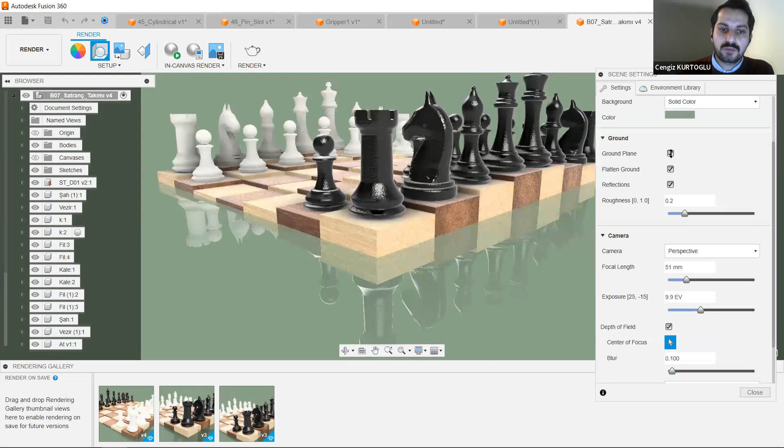In this project, I assign a color as a solid color for the background, and brightness you can change as a lux meter here, just selecting the different types of level. Ground plane you can select or deselect as you want, and reflection has a roughness you can change for the parts.

For the camera, you can change the perspective. If you are a photographer or have knowledge about cameras, there's focal length and exposure you can change, the units in millimeters for the focal length, and the whole image could be changed here with isometric perspective.

Depth of field, you can also change as you want. Just set the point as the center of focus, and the other parts outside the center of focus could be blurred.

And the aspect ratio you can change, assigning your own value as an aspect ratio. Here it's a 16 to 9.

Decal, you can add your icon or logo, and in Canvas render you can render it as you want to get a high quality image, up to 4000 pixels here. It's very handy, and the render workspace can work on your computer and also on the cloud systems. It's a very quick way for me to create my renders.

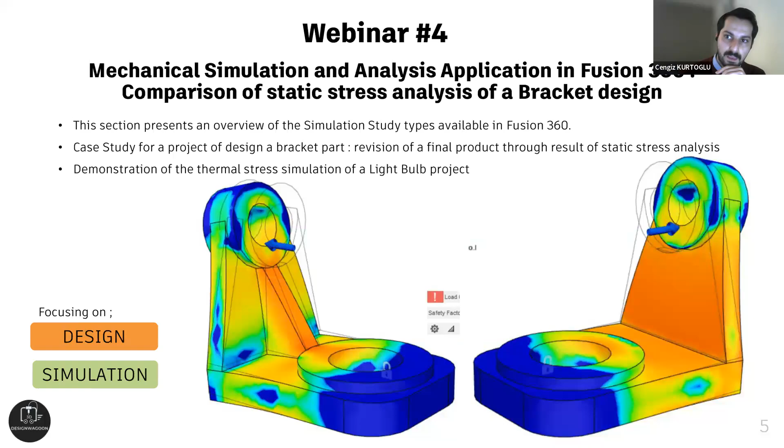I have a question: do you have tutorials or videos for amateurs? Yes, we do. From these webinars and knowledge points you can have access. Also, Autodesk has different types of tutorials particularly on Fusion. And if you want to check it out, Design Wagon has YouTube and Instagram channels with different types of tutorials.

Last question: in rendering, the only difficulty I found is when we import an image and we need it transparent. You can actually change the visibility. After that, I already created these types of projects, if you change the visibility you can get transparency.

If you have any further difficulties about this particular project you're working on, you can send me a mail and I will be happy to answer. Thanks a lot.